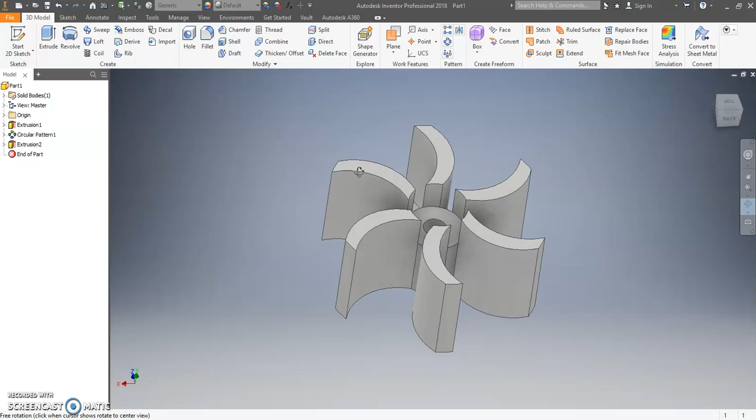So now that we have our impeller created and we can see that we have everything that we want, it fits on the shaft nicely, and let's say we want to make some updates, improvements, and or maybe some changes.

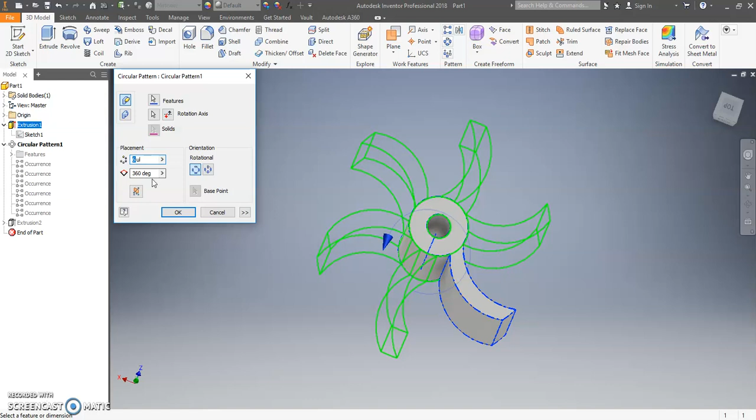So if I want to change my impeller blade number, all I have to do is go over here to this left command area, the command box where it says Model, and double click on Circular Pattern. If you feel you need to find another way, or want to try more or less impeller blades, all you have to do is click here and type in the number you want—3, 6, 36, 8, whatever you prefer—and hit OK. The program automatically changes that for you.

So now I'm going to go back to my original 6 impellers, and I'm going to hit OK.

So now what I want to do is add either a face to this to see if enclosing one side will help this have more water flow, or if I want to enclose both sides.

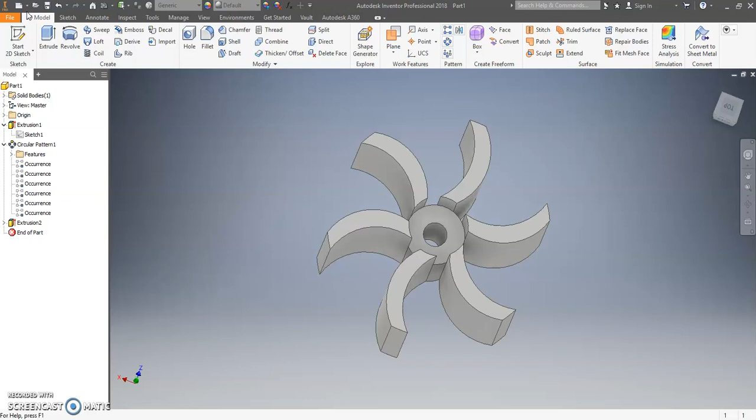Before I make any changes, I've already saved my drawing, so we're going to do that again. Go to File, Save As, and save your part under your name or anything you want. I'm going to put Rush Impeller 6 open curved, and that tells me that's the file I'm going to keep. So now, whatever I do to this file, I can always go back, close it out, and not worry about messing it up.

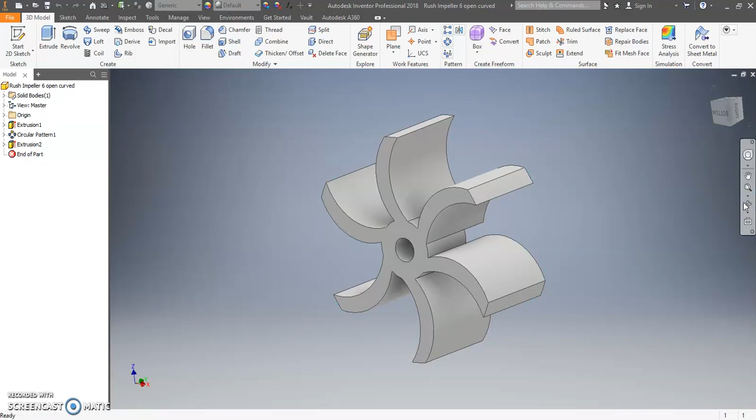So I want to put just an enclosure on this back side here. I'm going to start a new 2D sketch and click on this back side. Now, looking at this, we have a sketch mode.

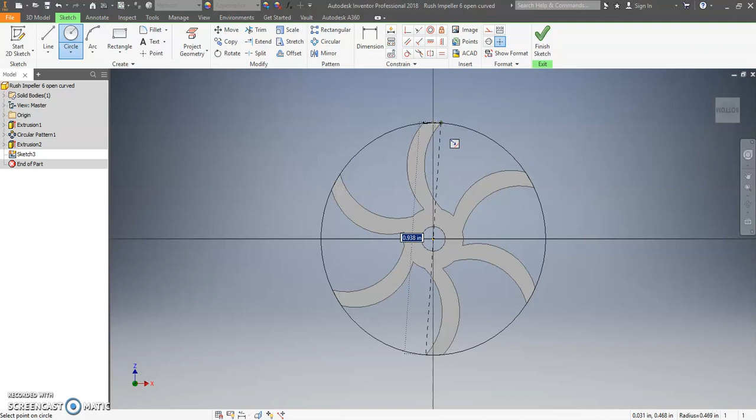So now I'm going to go back to my Circle command, click on where it snaps to green, and click up here to where it snaps to this actual arc at the top. See how it turns black? That means it is fully constrained. I'm going to click on that, and now I have a green circle. I'll right click, hit OK.

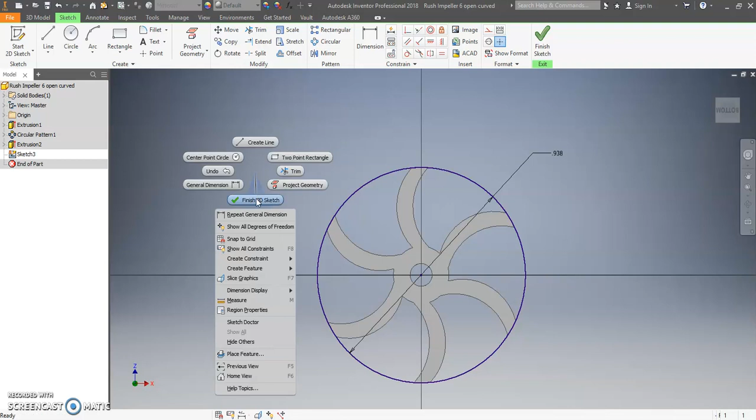I'm going to dimension this to make sure it's still 15/16 of an inch, which it is, 0.938, 0.9375. Click OK. Now I'm going to right click OK, right click again, and hit Finish 2D Sketch.

Now we know that our impeller cannot be any thicker than 3/8 of an inch, which means the depth from this point to this point can't be any more than 3/8 of an inch.

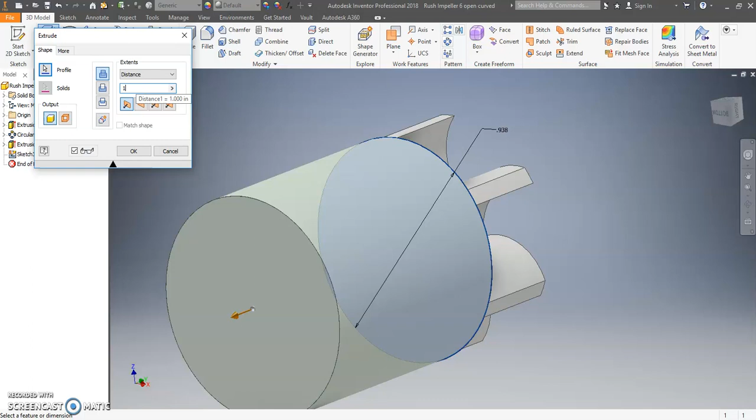So when I go to extrude this, I'll go back up to my Extrude command, and notice it automatically goes to 1 inch. Well, I want this to be 1/16 of an inch, so I'm going to type in 1 divided by 16. Now you notice it is extruding out from the impeller, which is going to make my impeller too wide.

So now I'm going to switch directions where it says Direction 2, and it's going into the actual impeller itself. Now you want to be careful, because when you change directions, it automatically brings you to the Cut command.

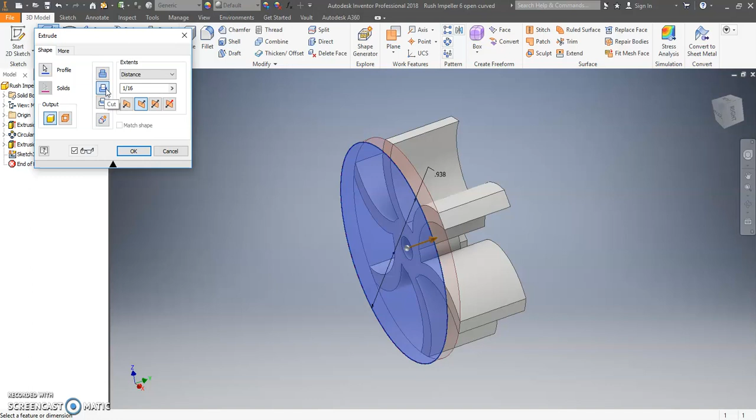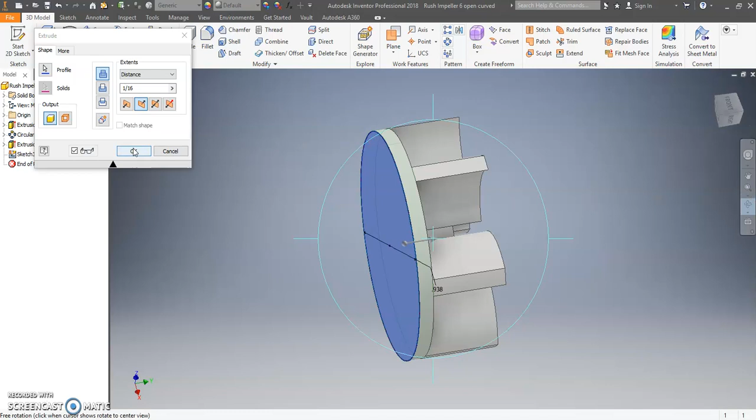So we want to go back to the Join command, and when I do that, it shoves the actual 1/16 of an inch enclosure on the back side down into the impeller, so now we're not losing or adding any depth to our impeller. Once I do that, I'm going to hit OK.

And now I have the back enclosed on my impeller. But now I don't have my shaft hole, so what I'm going to do is start another sketch.

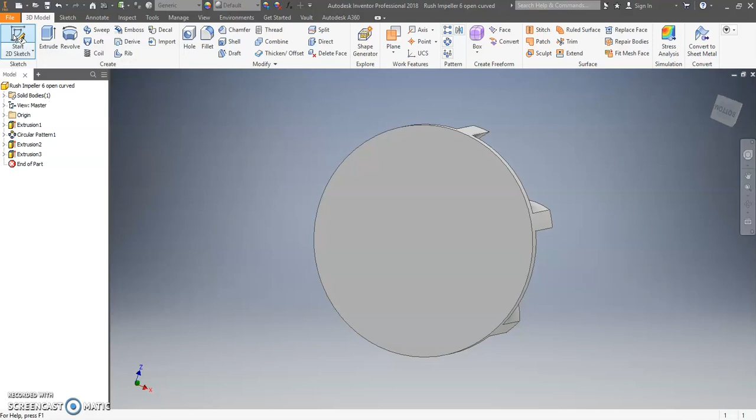Anytime you want to add or take away from your drawings, you always want to add a new sketch. So I'm going to add a new 2D sketch, click this face here, and it automatically brings up my piece.

Now what I want to do is use a little command called Project Geometry. When you project geometry, it brings the geometry you already have drawn from any face to where you can see it, so you can use it to snap to. Then when you click on it, it turns yellow. I'm going to right click OK.

Now I'm going to go back to my Circle command. I'm going to click on the center point here, and go back out to that yellow little circle. And if you notice, it says it's already 0.10 inches, which is the center of our shaft, which is what we want. So we're going to left click again, and there it is.

When it turns purple, that means it's fully constrained and fully dimensioned. If I were to try to dimension this and click on the dimension where it says 0.1, it's going to come up with an error that says adding this dimension will over-constrain the sketch.

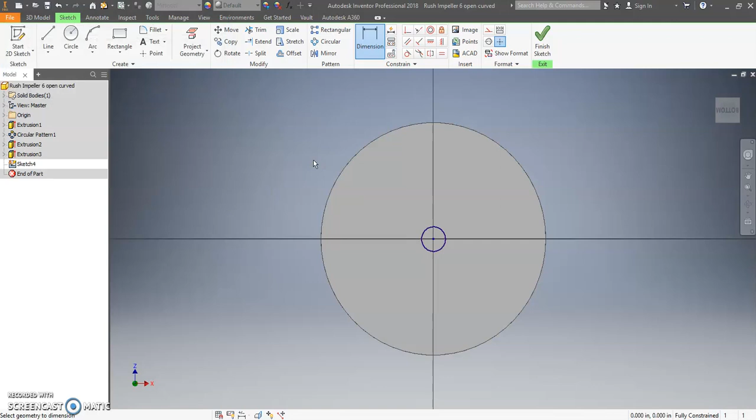So we don't want to do that. We already know it's 0.10 inches, so we're good. We're going to hit cancel. Now that we have this hole here, we're going to right click, OK, right click, finish 2D sketch.

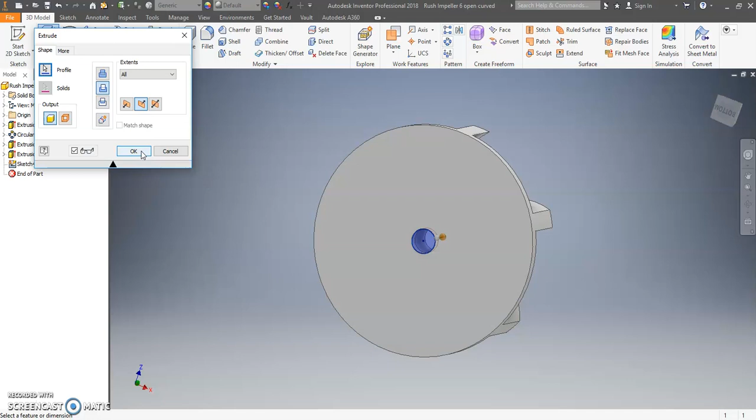Now we have a hole here, or a circle. So now we're going to hit extrude. We need to cut this away, so we're going to go to our cut command, and we know it's 1/16 of an inch, but just to be on the safe side, we're going to go distance, and we're going to go all. That just ensures us that it's going to go through the whole piece here and still have our 0.1 inches of hole so we can fit it on the shaft of the motor.

We're going to hit OK, and then we're going to hit our orbit command here so we can rotate around and look at it, and we have our hole back into where our impeller is, and now we're good to go. So this could be another impeller that you can use for your project to see if that will give you a better efficiency or more flow.

Now we're going to save this here because let's say we want to update and put two sides on it, make it totally enclosed. So we're going to save this here, and we're going to put there Rush Impeller 6 open curved. We're going to put that as semi-curved. And then we're going to hit save.

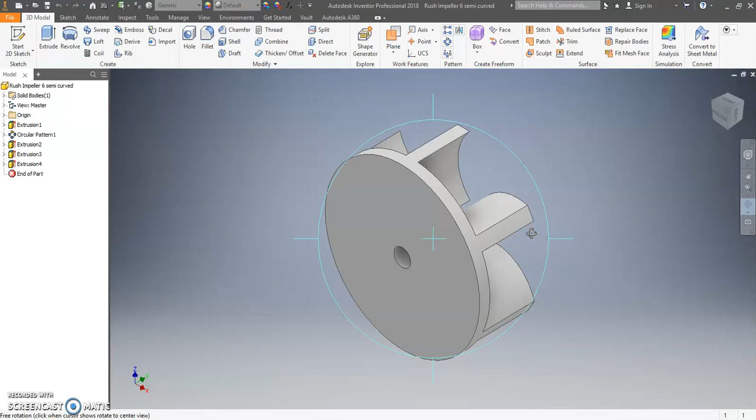All right, so now the drawing is saved, the part is saved, there's nothing else to worry about, we're good to go if we make any changes.

But now I still want to enclose this whole thing because I've done some research and maybe it's going to make it more efficient if we close the whole thing, maybe it won't. So I think it might, so that's up to you to decide, but we're going to go ahead and put a full enclosure on this.

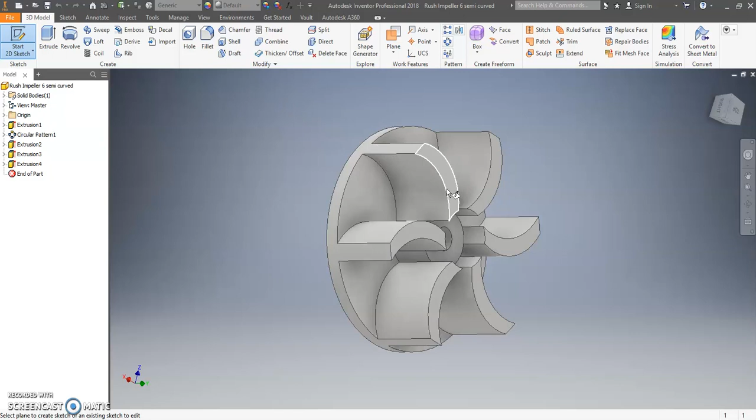So we're going to go back to start a 2D sketch. We're going to click on one of these faces here, and now we're going to project geometry yet again. We're going to click on the outside of one of these circle faces here till it turns yellow. That's just so whenever we draw our next circle to enclose this part, we can click here and see how it turns black.

And when it turns black, that means it is fully constrained. And I'm going to dimension this, and it's going to come out to 0.469, which we're not going to pay attention to that because we know it's fully constrained.

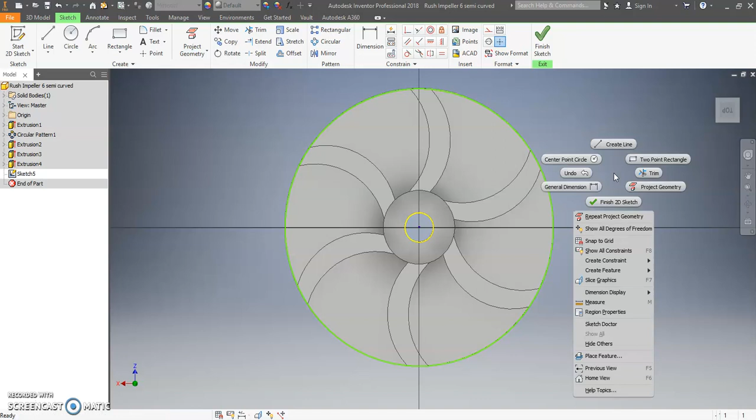So if we rotate this around, we can see that it is exactly the same size as the big circle. All right, so now what we can do in this sketch mode, we can go ahead and project geometry here so that we won't have to make another commands for this hole to come through. So we're going to project geometry, and we're going to click on this here. So now this is yellow, and we have two circles in here. So we're going to right click, OK, right click, finish 2D sketch.

And now I'm going to go back to my extrude command, and I'm going to click on this outside part here. All right, now notice it says 1 inch. We want it to be 1/16 of an inch. We're going to type in 1 divided by 16.

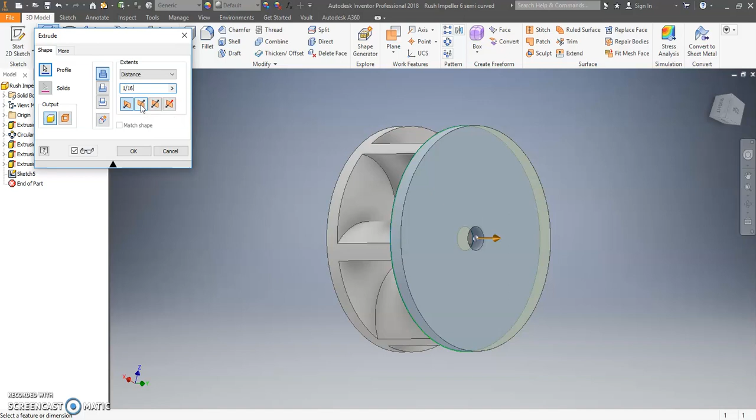And we want to change the direction because we can't add to the depth of our impeller because we have to have it exactly at 3/8 of an inch. So we're going to change the direction back into it. Once again, it has defaulted to the cut command. So we need to go back and do the join command.

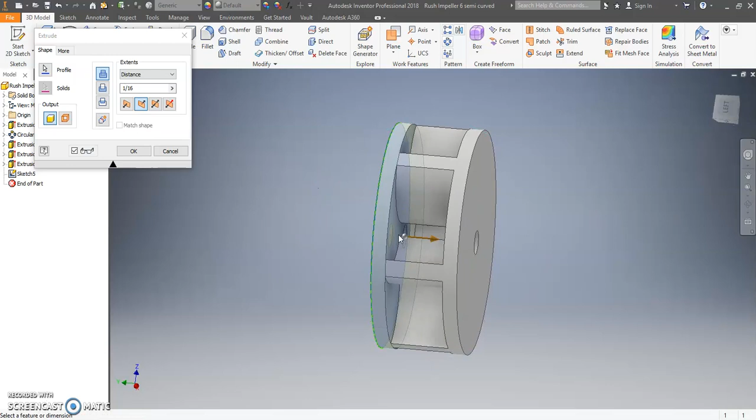And then we can rotate around and look at it. We can see that we have enough space for water to go through inside here at this point. And it's fully enclosed. So I'm going to hit off the orbit command, I'm going to hit OK. And now our impeller is fully enclosed, and that can be another option you can use for your project.

So go back to home. There's our impeller, and it is fully enclosed. So we're going to go to File, Save As, and it is impeller semi-curved, and it's going to be, we're going to change it and make it to fully enclosed, or just put closed. So we're going to put Rush Impeller 6 closed. That way we know our impeller blades are closed.

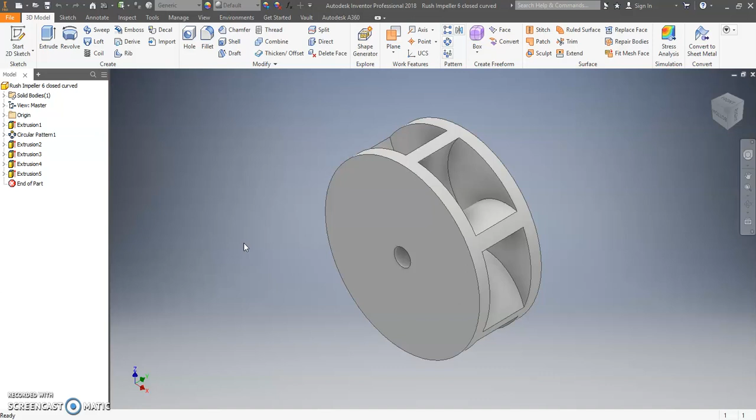And there we have it. So now, to export this so we can 3D print this, we need to go to File, Export to CAD format. And what this does, this is going to make, and we need to change this down here to a .stl file. So no matter what kind of 3D printer you have, you can use that to put it on the platform. All 3D printers on the platforms use .stl files.

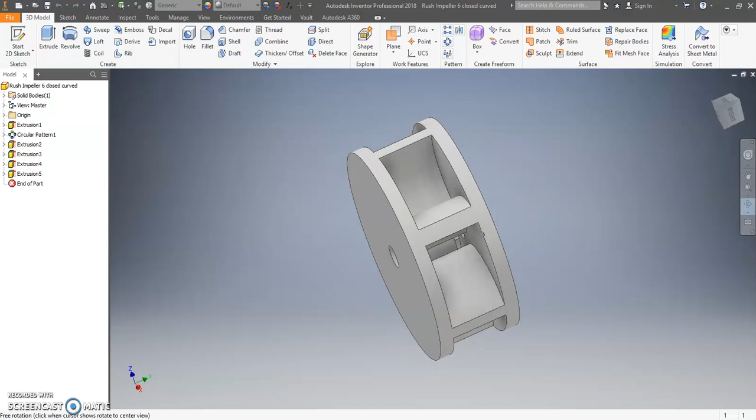So we're going to save this as a .stl file in the same folder we saved our other ones. As you can see, I've exported several other ones here. So we have Rush Impeller 6 closed, .stl, and we're going to hit save. So now when I need to bring this certain impeller here back out to take it to a platform to 3D print, it'll be there for me, and we can print it out and test it.